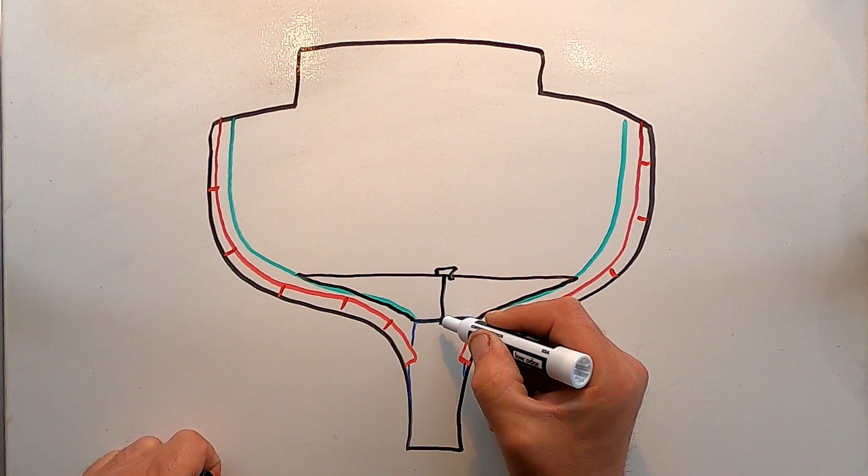So to get started, let's look at the typical cross-section of a wooden sailboat. Your classic wine glass shape, you have your keel, your red is your planking, inside that in green is your frames, and to secure it all together, they're connected with what's called floors, which are the beams that connect the left and the right. Super strong, super robust, but not what I'm dealing with.

Okay, so let's ask Peter from the past to come forward in time here and give us a bit of background on what we're dealing with. Or maybe not that far back.

Okay, I don't want to go on at great length about all the intricate details of the way wooden boats are put together and all the problems that they have and all the problems this one has. I'll try to spread that over lots of episodes because there is lots to talk about. But I wanted to give a little bit of review about how this particular boat is put together and what I think are some of its shortfalls.

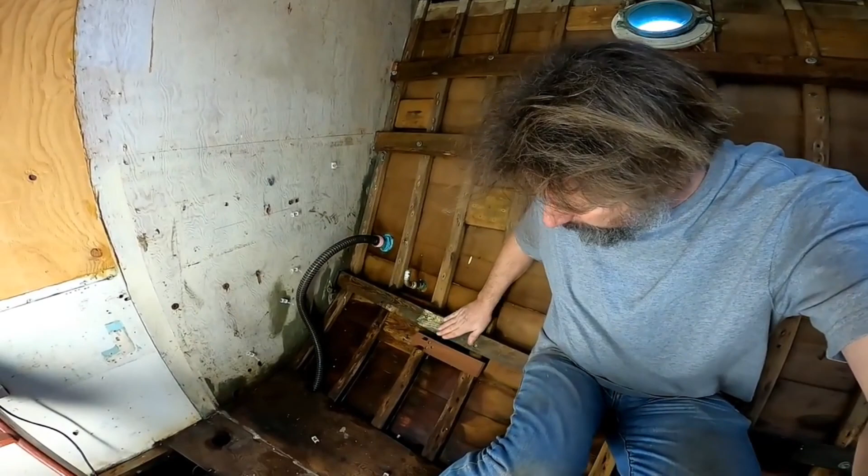Okay then, rot, iron sickness, and electrolysis delignification are problems pretty much all wooden boats share. But this boat and those similar to it share one more problem, which I think is actually its most serious problem. If you look right here at this stringer, you can see that right here the frames take a pronounced bend behind this stringer.

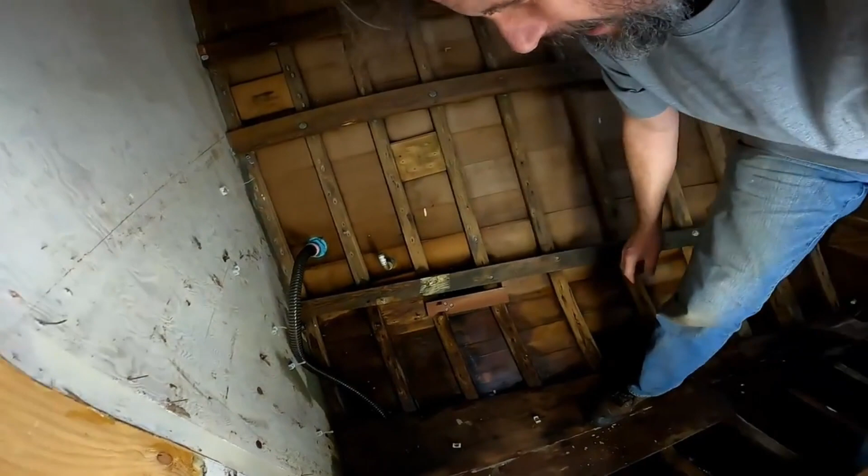Well, this gets more and more pronounced as you move aft. As you look up forward, this stringer is basically a continuous curve. As you move aft, it becomes more and more pronounced there.

Well, that's for a couple of reasons. The design part of it is because this boat has a hard chine. It starts about where I'm sitting, works its way all the way a few inches under the waterline, all the way to the transom where it's almost a 90 degree. The transom of this boat is almost flat on the bottom. In other words, it's a flat bottom boat. Very hard chine just below the waterline.

Means it glides through the water beautifully. It's only drawing about 2 inches of water at the stern, and underway the water just sort of glides off the back with almost no wake. Brilliant. Thank you, Edwin Monk. Except it creates a corner. Well, steam bent oak frames aren't particularly good at going around corners. It's not even a very sharp corner here, and I can tell you this frame is broken.

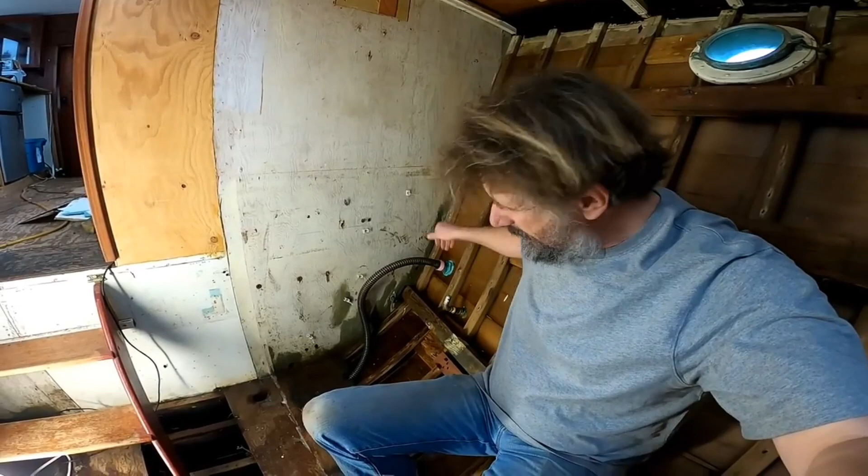This frame is broken. Now that alone isn't tragic. Lots of boats shift and move around, and as long as you stabilize it, it's not the end of the world. But it is a sign of a problem. And the problem is, as I've said, you can't expect steam bent oak frames to take that kind of bend and not break, especially over time. The boats weren't meant to last that long.

The other thing that happens is, a round bottom boat has the strength of an egg. It's very, very strong. You put a corner in it, and suddenly loads on the keel and weight loads and other kinds of loads are flexing that corner, because it's not meant to be strong. They didn't build it strong from here aft. In fact, it's really bad. So there needs to be a system to strengthen up this connection. And as you move aft, it gets worse and worse.

Now, don't get me wrong, I think it's a brilliant design and it's incredible in the water. It's just a bit structurally complicated.

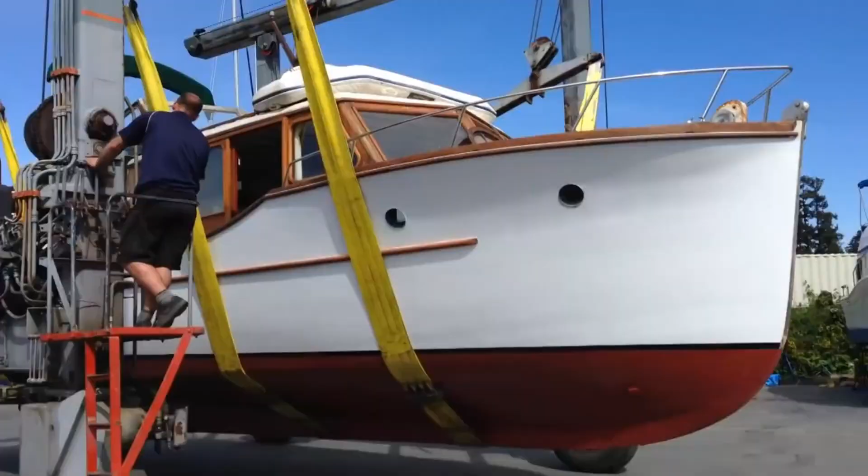I'm very fortunate to have one of Edwin Monk's new design hulls, which include a hard chine that becomes more and more pronounced as it moves aft. This is a cross section near the stern.

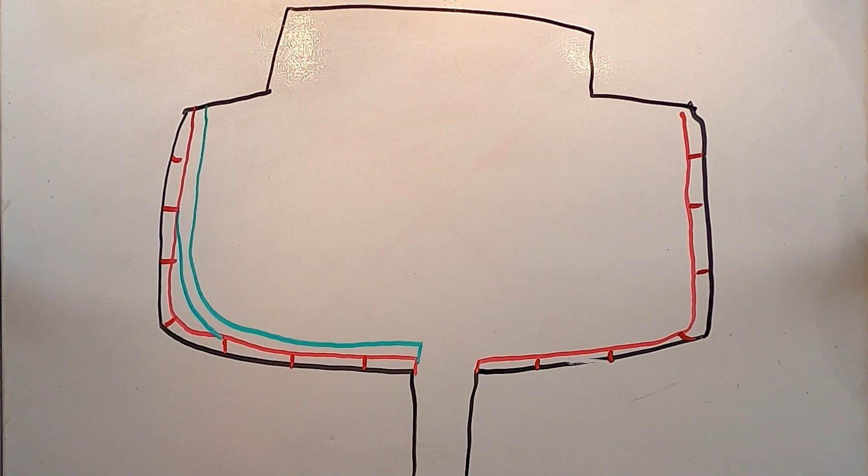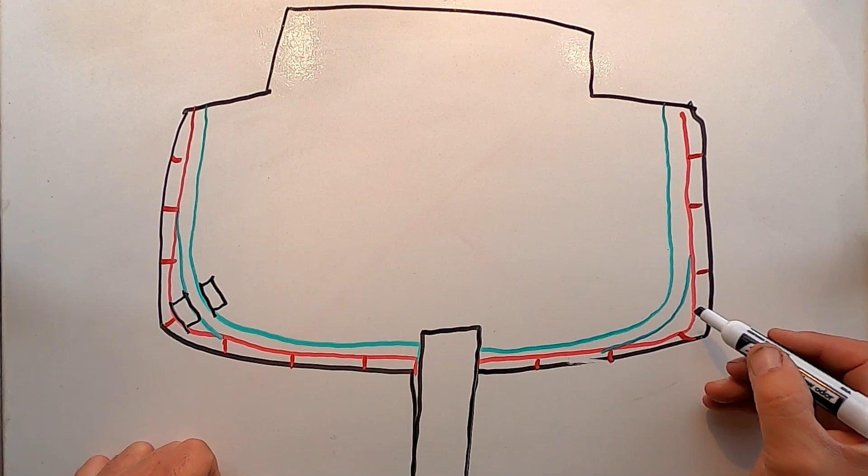So as we add in the various components of the hull, here we can see the planks in red. We have a very sharp corner, which isn't particularly good for steam bent oak frames. So what Ed Monk did, he made the frames take a much gentler curve, or at least a somewhat gentler curve, inside the actual hard chine of the boat, which creates a void between the frames and the hull, which he filled with another stringer, effectively an inner chine. He also put a stringer inside that as well, creating a very strong joint there.

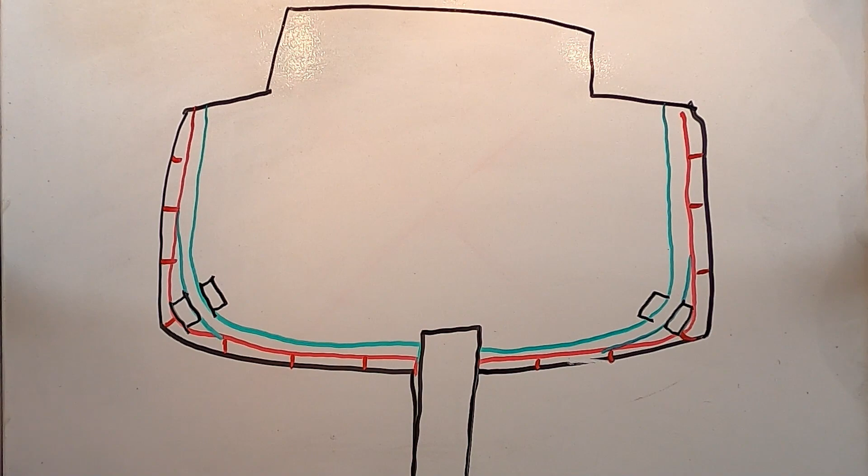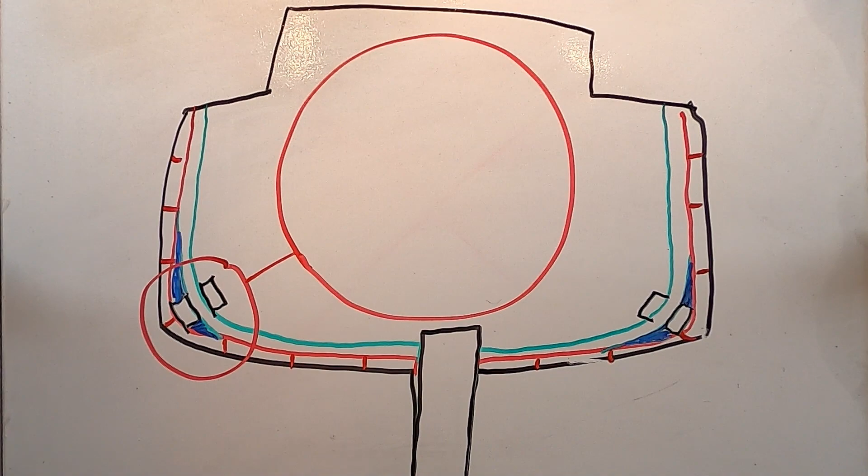There also end up being a couple of wedge-shaped spaces, which I'm coloring here in blue, where he put some little wood wedges in as well. Maybe we need to blow up here to get a clearer idea of what's going on. So there's the outside shape of the hull, including that hard chine, and here come the planks. Now for the more gently curved frame and the inner chine piece, as well as the regular stringer which is inside that. Of course, then we have those two little blue wedges that we have to fill in with some block, and the whole thing is held together with a big carriage bolt.

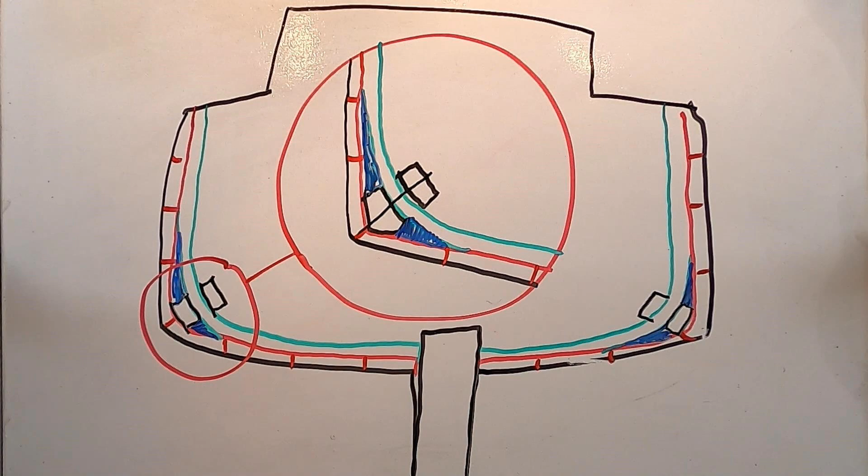Now, this is not a bad detail, but the oak frames still suffer and break. How can we make it better? But before we look at that, let's look at the forces in the hull.

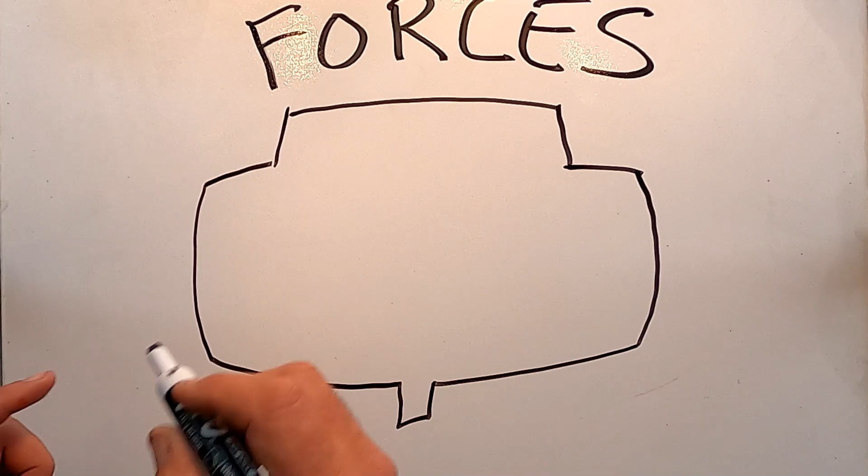Here again is the cross section of the boat, showing those hard chines as well as the water level. Much of the weight of the boat is actually conveyed down through the hull, and when the boat's afloat, that's supported equally across the bottom of the hull by water pressure on the bottom of the boat.

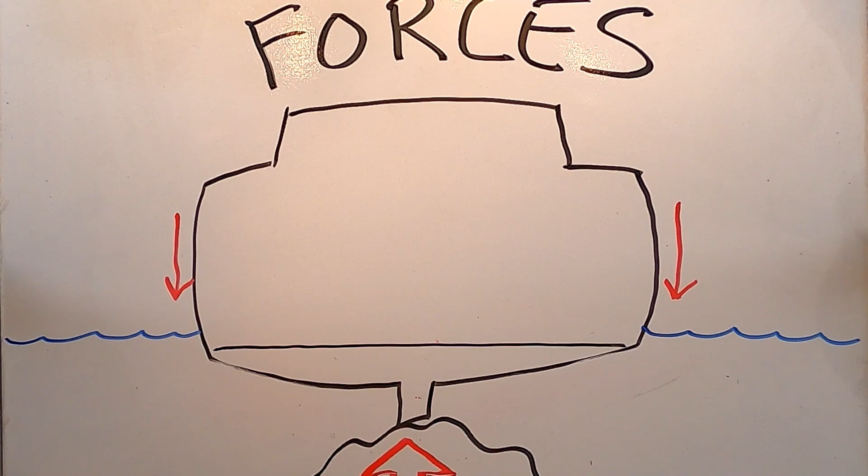That's generally okay, but let's look at the situation where, gosh forbid, the boat sits on a rock, or just on the ground, or even just at a hollow where the stands aren't placed properly, and all that force comes up on the keel. Well, then that force gets transferred to the outer edges of the boat, to those previously mentioned vulnerable chines. And that problem is further exacerbated by the fact that that force has to be carried to the outer edge of the hull through very shallow floor timbers.

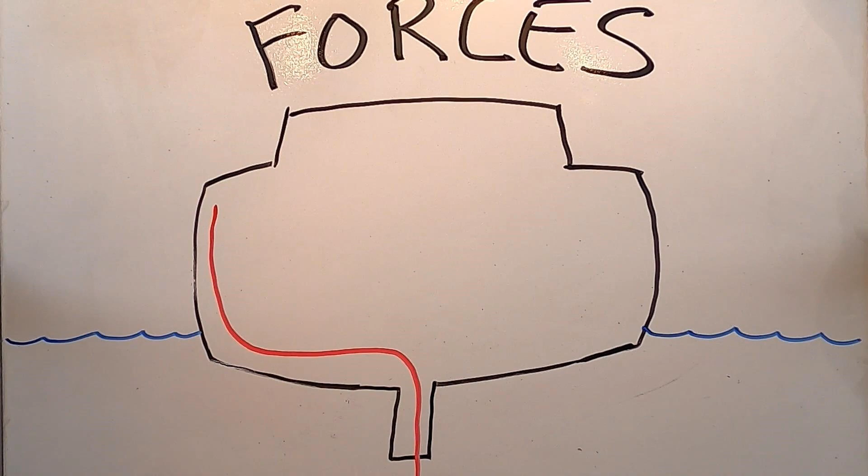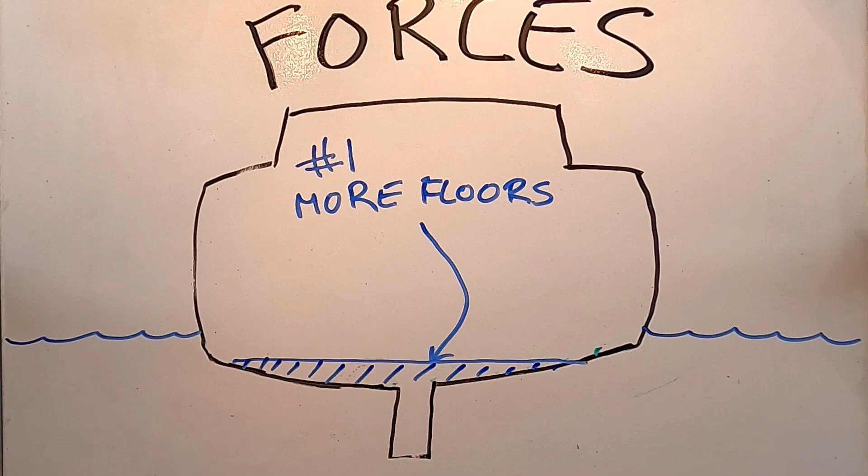So what I'm hoping to create here is a stronger structural line from the hull through to the keel. I'll do that with two structural improvements. The first being more floor timbers. I'll put new floor timbers, exactly the same as the old ones, but halfway between them, so that my on-center for floor timbers becomes 4.5 inches instead of the 9 inches they're currently on, which will more than double the strength of the bottom of the boat.

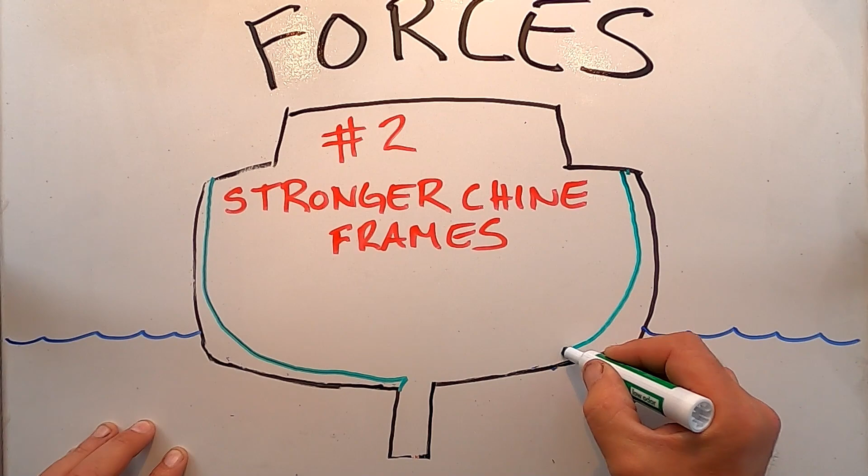The second step will be to create stronger chine framing, and that too involves sister members. I'll be sistering in new frames, but not quite the way you might think. Let's have a look.

Chine strengthening, that's a thing. Let's look at that chine one more time, starting with the planking here in red, then the steam-bent oak frame taking the slightly gentler radius.

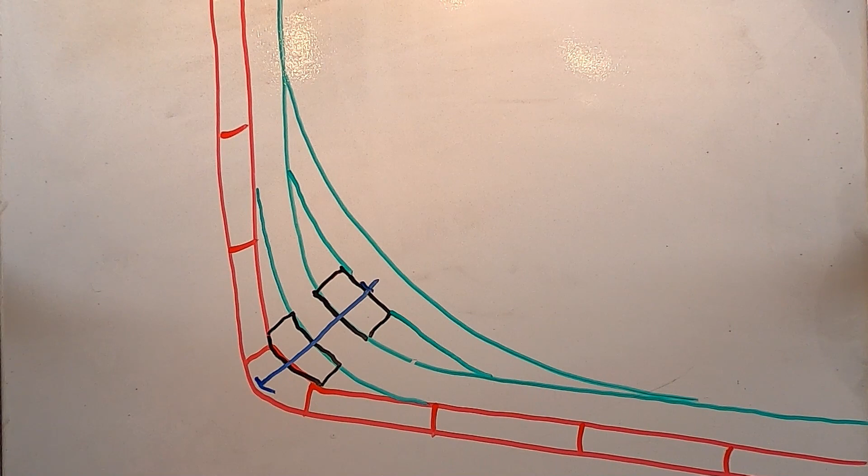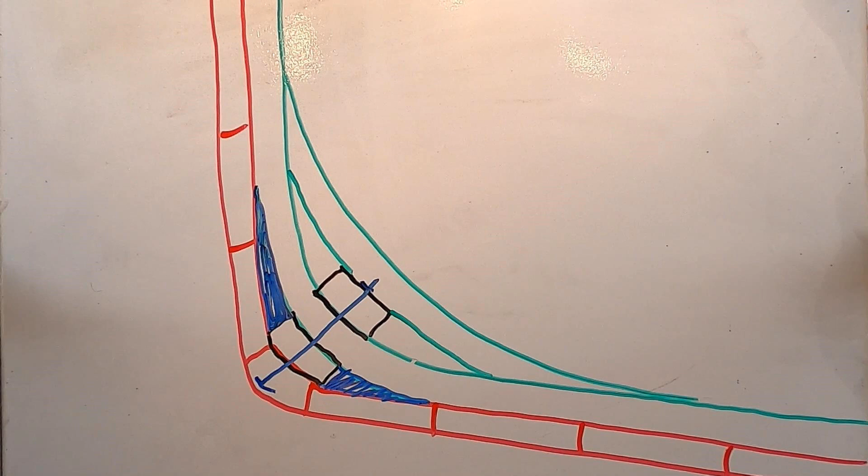The inner chine and the stringer all held together with a carriage bolt. Now, what if we put a sister oak frame halfway between the existing ones, like I'm going to do with the floors, staggering every 4.5 inches, but not at the chine log and stringer, but actually on the inside of that second stringer, making it a much stronger connection. It's starting to get hard to tell what's going on here.

Let's go to 3D, this should be a lot clearer. First, let's remove everything and start from scratch. What we're looking at is just the planking, the basic hull, and I left the chine log in for simplicity. So let's put back the parts we've already talked about: the little wedges that allow the frames to make a smooth angle with the hull, the frames themselves, the floors, the inner stringer—and we're pretty much back to where the boat is now.

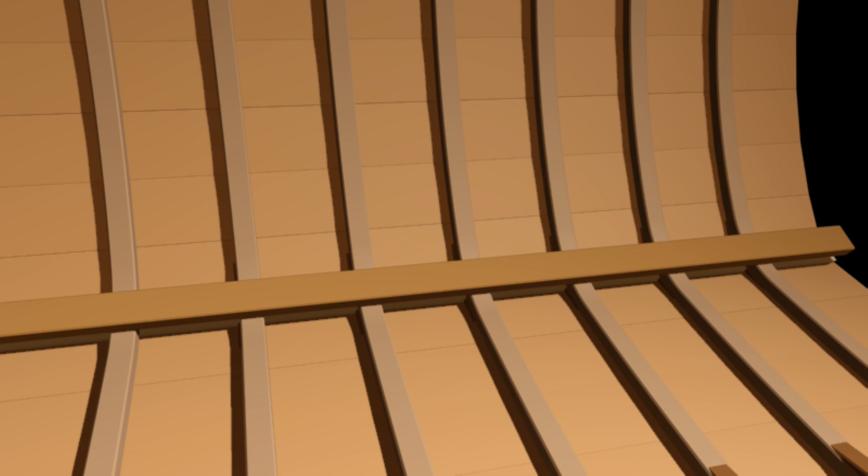Now if we're going to add some more frames, some sisters, I'm going to put them halfway between the existing ones, starting with the little wedges again, and here we go. Yes, plastic frames, only in the section where the new frames aren't going to touch. I need something to put screws in from the planks, and plastic's perfect here because it's flexible—I can slide it up behind that stringer.

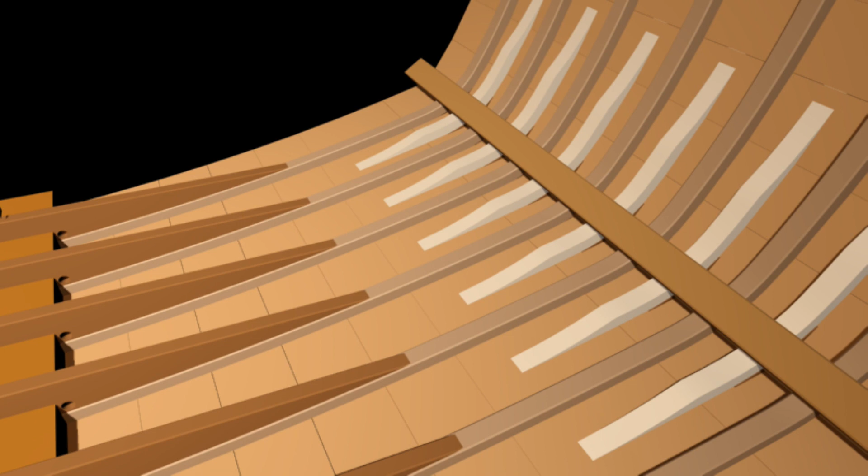So carrying on, we'll put in the new, much more gradually steam-bent frames, which will come down on the outside of those stringers and fair into the plastic ones, some bolts to hold it all together through to the chine log, and new floors, making it a really stout setup.

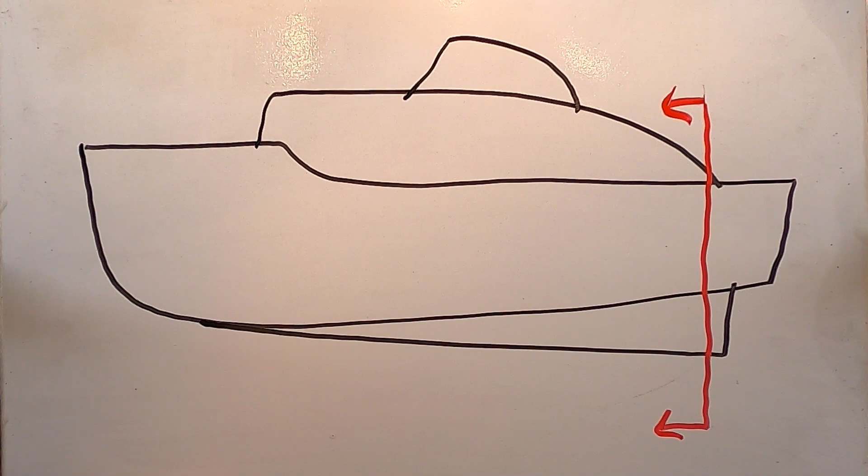Hang on, we're not quite done yet. We've been spending this time looking at the situation at the very aft end of the boat, where it's most severe. Let's work our way forward and look at a couple of different conditions. As we move forward the chine becomes less and less pronounced, so I may not have to go through such heroic measures to strengthen the hull adequately. The curve of the frames is less and the floors are deeper, so it's just not that bad.

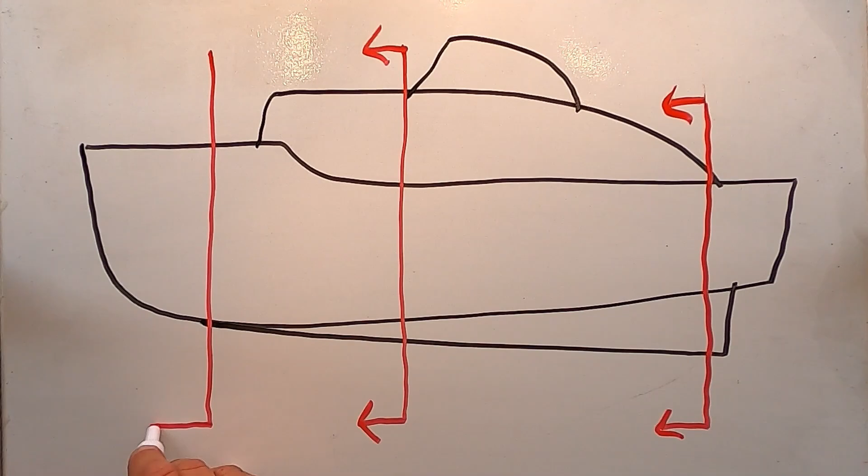Then as we get up into the bow, the chine disappears altogether and we have a cross-section that resembles something closer to a more traditional wooden boat. The other huge advantage up here is that the floors are very deep, making it very, very strong.

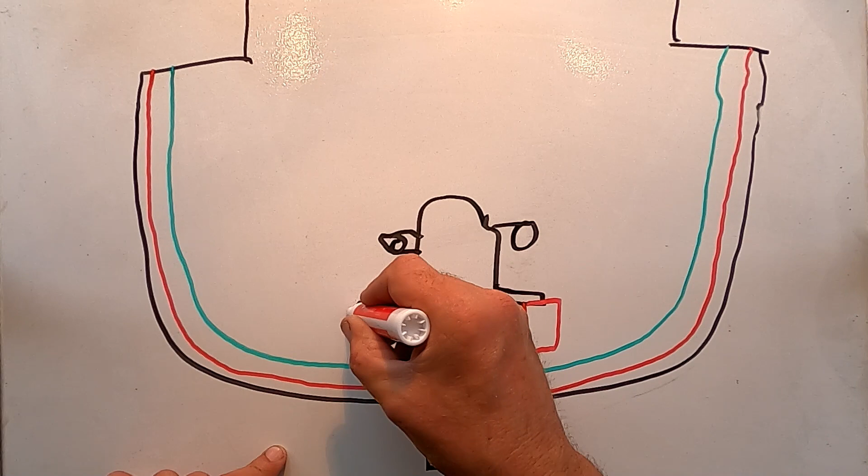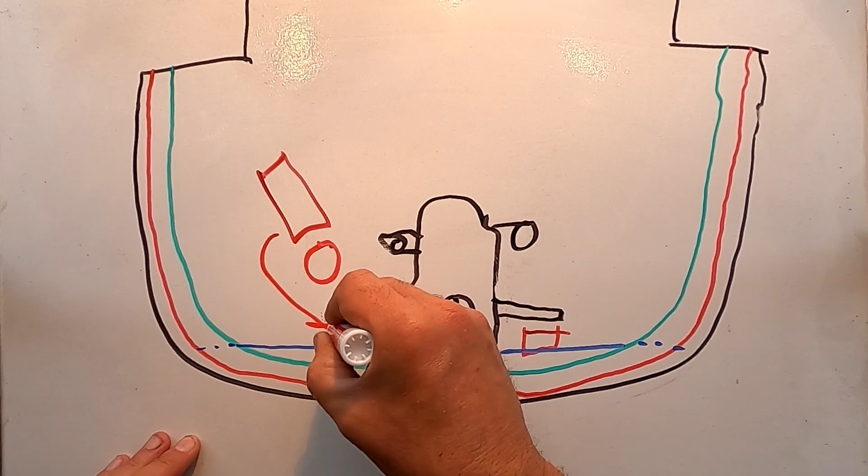But wait, did I say the middle of the boat was going to be just fine? Well, maybe I forgot to mention that in the middle of the boat lives my very heavy, smelly, stinky friend—yes, the engine lives here. And it sits pretty low in the boat. It sits on two big engine beds which sit on the floors. The only problem is the engine isn't that big—it's actually this big—and as a result it cuts out the floors. Worse yet, the engine mounts aren't there, they're actually significantly lower, and as a result there's nothing much left of the engine beds. Something needs to be done here, but that's a discussion for another day.

Anyone feel like a beer?